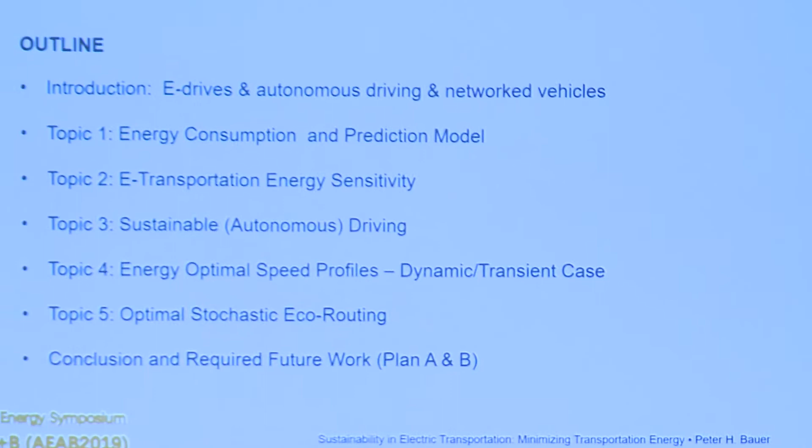Let's go straight to the outline of the presentation. In the introduction, I'd like to give a little bit more motivation, and introduce three arising concepts, namely e-drives, autonomous driving, and networked vehicles, and show you what opportunity those three concepts together provide. Then I'll go through 5 different topics, all related to these 3 concepts.

Topic 1 is basically the model that you need. You need an analytical model to do anything in terms of optimization, but I'd spare you most of the equations. I'll just go through the basics there.

Then I'd go through the electric transportation energy sensitivity — that explains many of the things I'll present later. After that, sustainable driving, that requires autonomy also, and I'll show you the key elements of that.

Topic 4 is the topic I'm currently working on with my graduate students: energy optimal speed profiles. This has the biggest potential for savings, in my personal opinion, so I'll spend a significant amount of time on that.

Finally, if time permits, optimal stochastic eco-routing, and conclusions and required work for the topic of the conference, that is plan A plus B. So let's get started with the introduction.

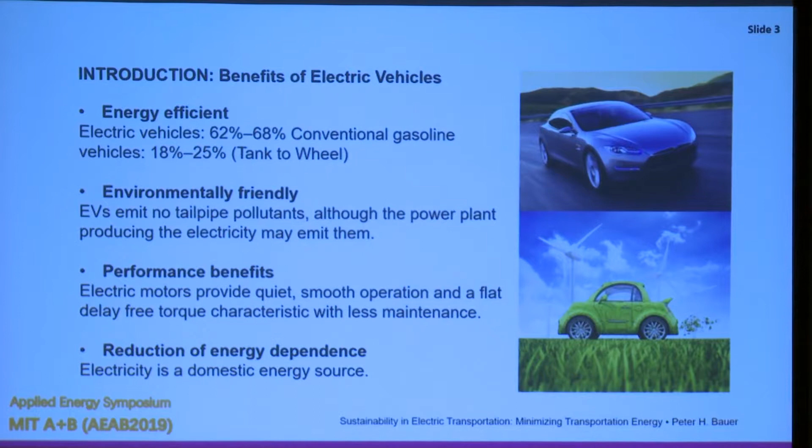Also in the US, a lot of times, the reduction on energy dependency is quite an issue. I'd like to mention two new concepts that are on the horizon that are very important and make up the fundamental premise of this talk. One is the advent of self-driving systems.

In order to execute optimal or energy optimal algorithms, you have to have a computer running your car, because a human A can't do it, and B most likely is not willing to do it. Also, if you have self-driving software, you usually have a pretty high-powered processor in there that can do real-time optimization and execute the algorithm.

Third component is global traffic situational awareness. Right now you hear a lot about networked vehicles and situational awareness concepts popping up everywhere. This is very important to plan ahead and incorporate situations like traffic jams, weather and environmental information. So these three together — self-driving systems, global situational awareness, and e-drives — will bring about many opportunities for sustainability in transportation.

So this is how I see the whole picture. Electric drives together with intelligent transportation systems and autonomous driving, put together, provide a sustainable transportation system. But in order to exploit that, you need to have a good model for estimation and prediction of energy usage in a vehicle. And when you have that, you can do many things with it.

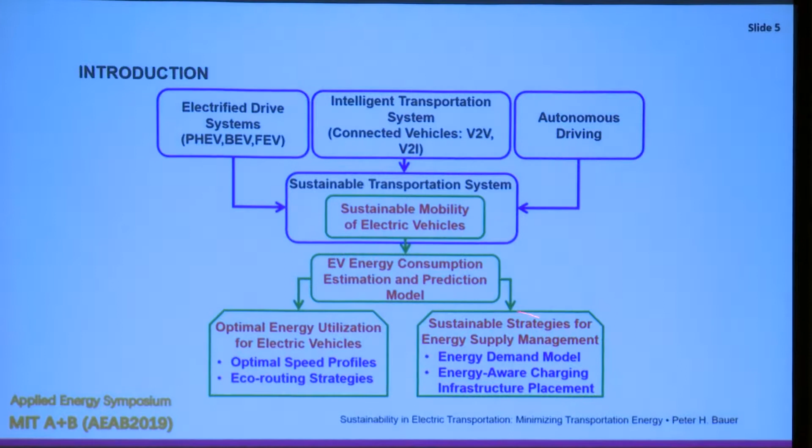Today I'll be concentrating on this side: optimal energy utilization for electric vehicles, optimal speed profiles, eco-routing strategies. But you can also do things like sustainable strategies for energy management, where to place your charging stations, and things like that.

So that gets us to topic one, the model. I don't want to spend too much time on it, but you should know that the battery is basically the primary source of electric vehicles. By the way, this entire talk is on electric drivetrains — what I'm going to show you does not work very well for conventional gasoline vehicles.

The power flow is from the battery to the wheels, going through components like the power converter, motor controller, electric motor, mechanical powertrain, each with an associated efficiency. You also have a reverse power flow for regenerative braking, with different efficiencies associated with it. Very particular in electric drives is that parasitic power comes from the battery directly — so if you have your heater or air conditioning on, that directly affects your range, for example.

If you look at the power needs at the wheel, it has three main components. One is to overcome air drag, the other is to overcome rolling resistance, and the other is to overcome the force to overcome acceleration. There is a fourth one, hill climbing, but we set it to 0 for simplicity in this case.

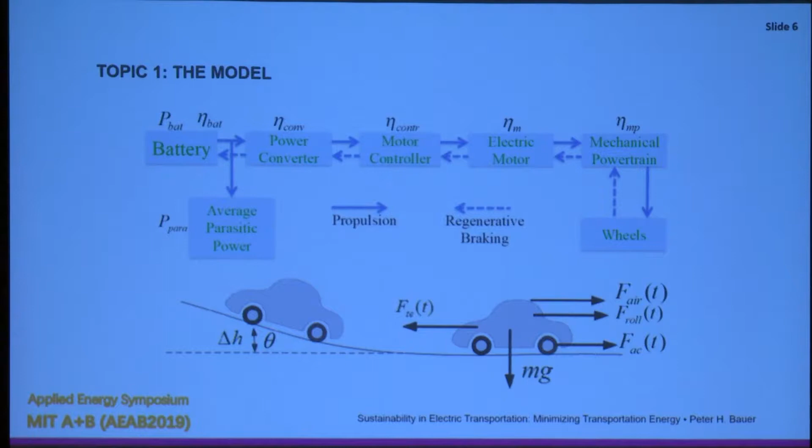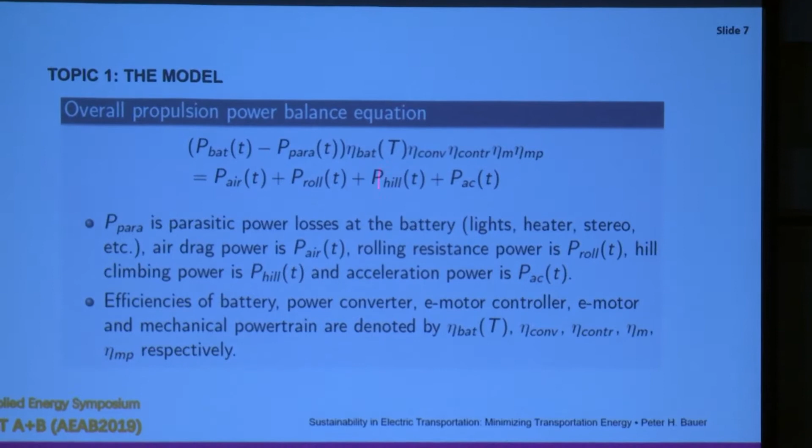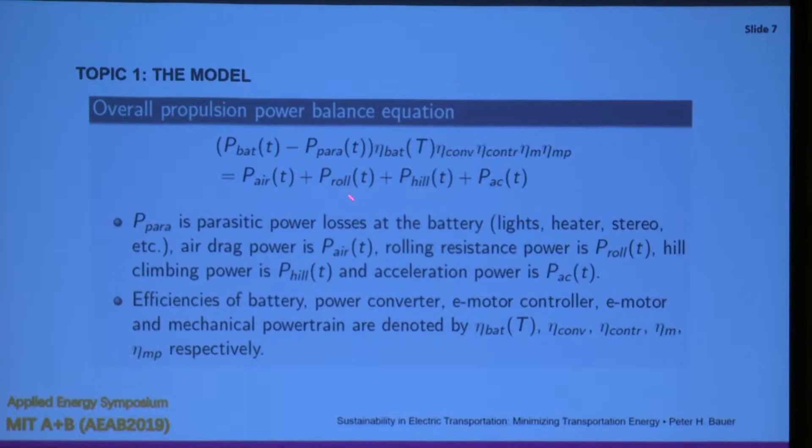So in equations, again, the same thing: the power coming out of the battery minus the parasitic power goes through the cascade of these different components. You multiply all these efficiencies, and what comes out on the right side is the power that arrives at the wheel. That power splits up into air drag, rolling resistance power, hill climbing, and acceleration power.

If you compare this with a regular trip computer, it tells you, well, you have 30 more miles, or you have 50 more miles. For electric vehicles, this is often not good enough, and you need a reachable range or reachable destinations on a map, because due to the high sensitivity of electric drives, these regions are not concentric circles, and they don't even scale with energy.

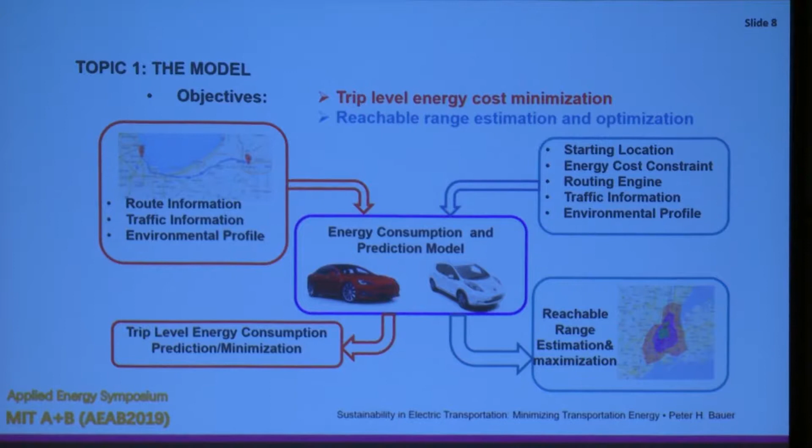So that gets me to topic two, which is very fundamental for this talk: transportation energy sensitivity. Electric drives have a much higher sensitivity to environmental or external effects. For example, wind speed, dynamic coefficient of rolling resistance, parasitic power, and temperature all affect the range and power needs of an electric vehicle. In the first part of the talk, I'm going to suggest that we can exploit these environmental factors.

The question I always get at this point is, yeah, you can do this for electric vehicles, but can't you do it for conventional vehicles? Why is that? The reason lies in the characteristic of the efficiency curves in the torque versus speed diagram. In electric vehicles, you have a large plateau that falls down towards torque equals 0 and omega equals 0. For ICEs, there's a very pronounced optimum in the middle.

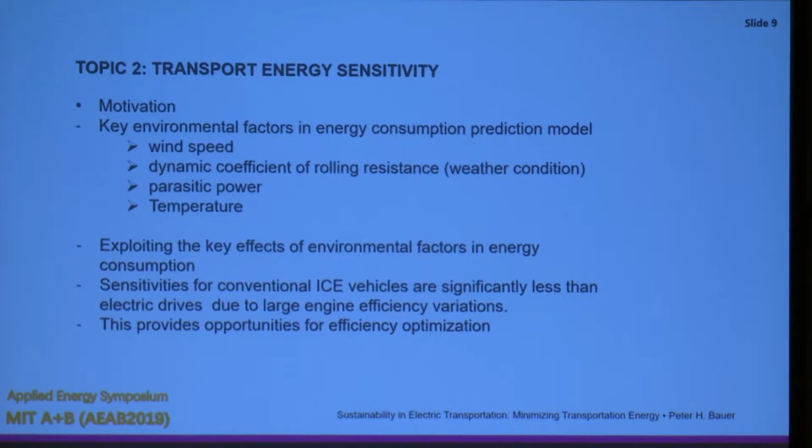So, for example, when you get a headwind and have to overcome that additional resistance with higher torque, a gasoline vehicle moves into a more efficient operating point, masking the effect of the additional power, so you don't see it very much. Whereas in an electric vehicle, efficiency stays about the same, so you need 50% more power, you draw 50% more power from the battery. That's the difference, and at the same time, it provides opportunities for efficiency optimization.

It's well known that depending on where you run your electric vehicle geographically in the United States, it takes more or less power. In warm, flat areas, you're doing much better than in hilly and cold areas.

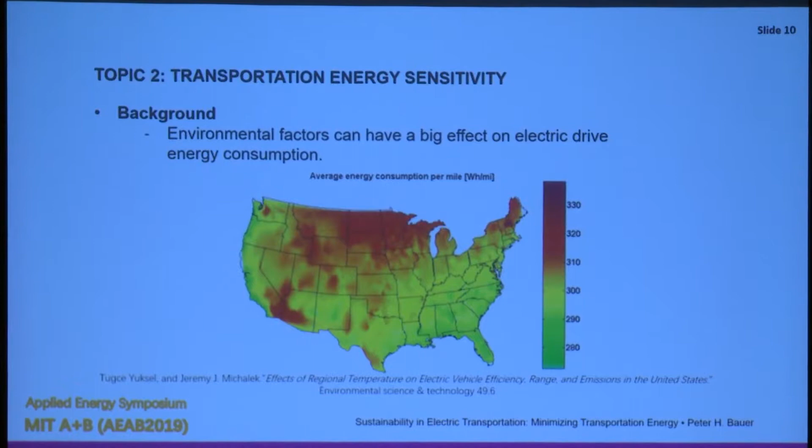So I'll give you a bunch of examples and simulation results showing the different sensitivities. We define sensitivity as the effect of a relative change in quantity x on the relative change of quantity p. X, in our case, is rolling resistance, wind speed, and things like that, and p is the battery power.

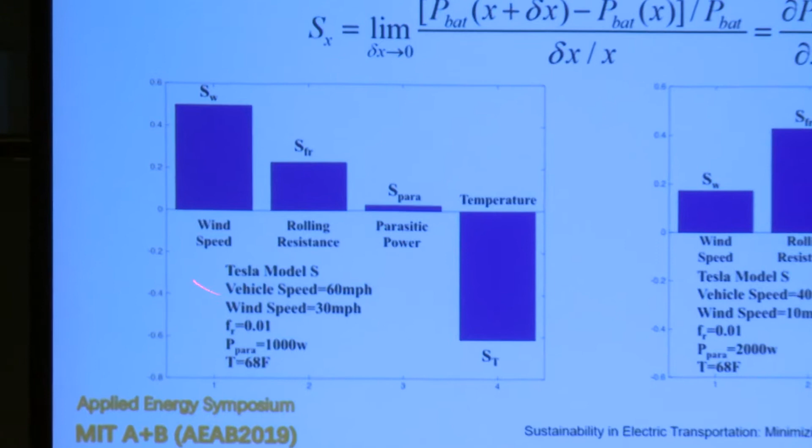Here are two examples to illustrate the point. In both, we're looking at a Tesla Model S. Temperature is the same, 68 Fahrenheit, and rolling resistance is the same, 0.01, which is typical. On the left, we're doing highway driving at 60 miles an hour with a headwind of 30 miles an hour. On the right, we're doing city driving at 40 miles an hour with a headwind of 10 miles an hour. In big cities, you typically don't get lots of wind because it's occluded by buildings.

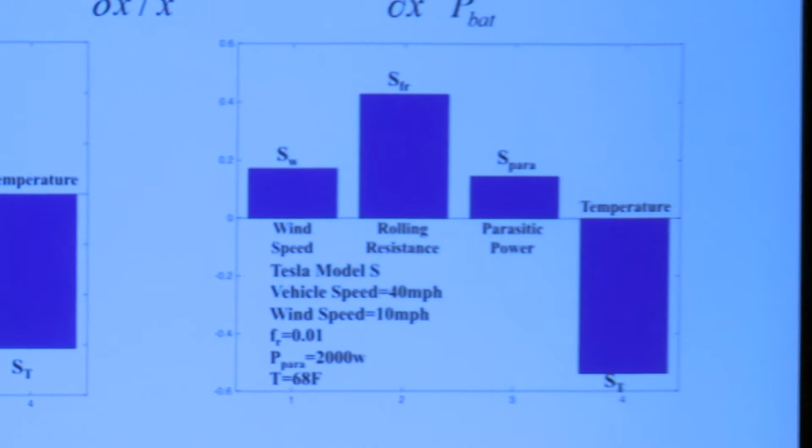So if you look at this, in highway driving, the wind speed sensitivity is huge compared to city driving. Rolling resistance, on the other hand, is not such a big factor on the highway, but in city driving, it makes up quite a bit.

Parasitic power almost plays no role in highway driving because most of the power goes to propulsion, whereas in city driving, this is an important factor. Temperature effects are about the same.

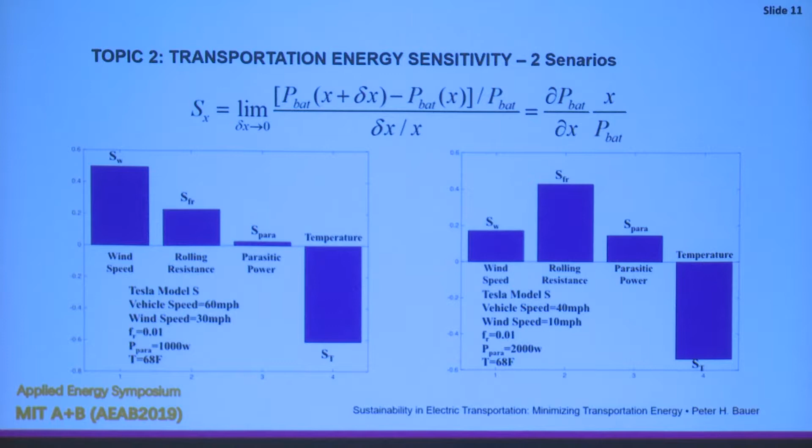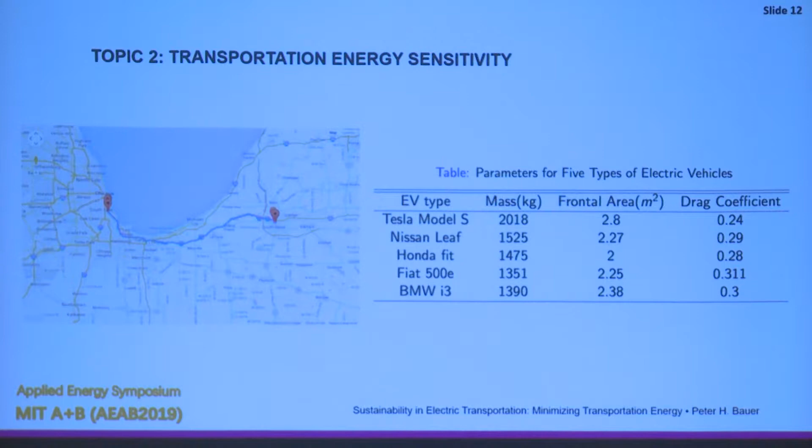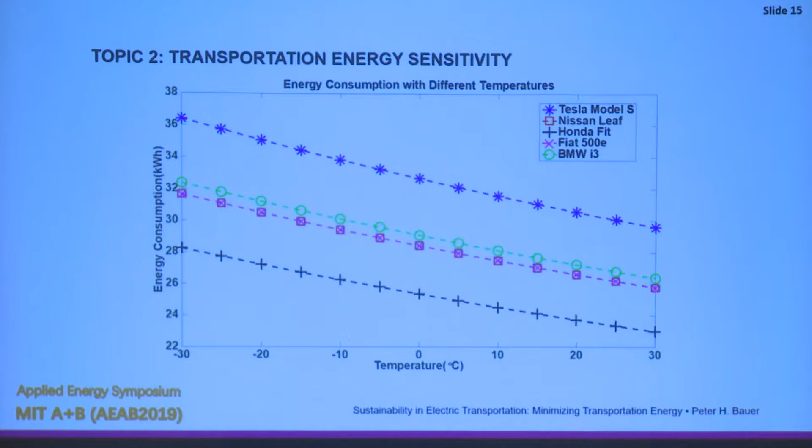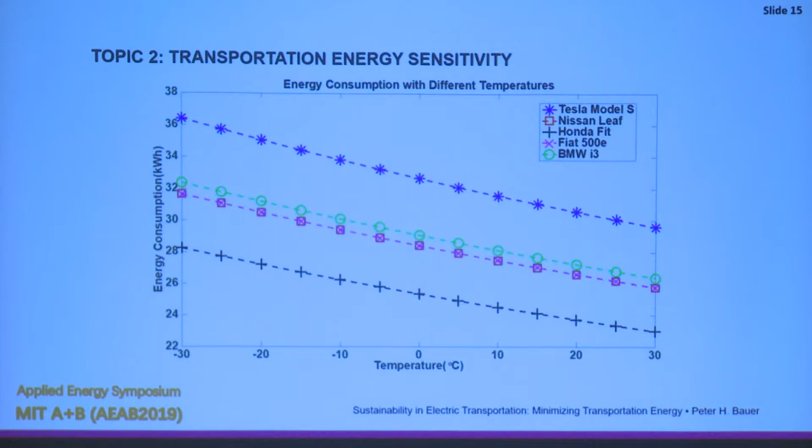The similar situation appears to be the case with temperature. The dependency is not as great, but the warmer the temperature, the higher the efficiency of the battery, and all vehicles perform about the same. For the energy consumption as a function of the parasitic power, there's almost no dependency. Why? Because when you go 70 miles an hour on I-80, you're burning about 30 kilowatts for transportation energy, and whether you have your AC unit on at 100 or 500 watts, it doesn't really matter much in the big picture.

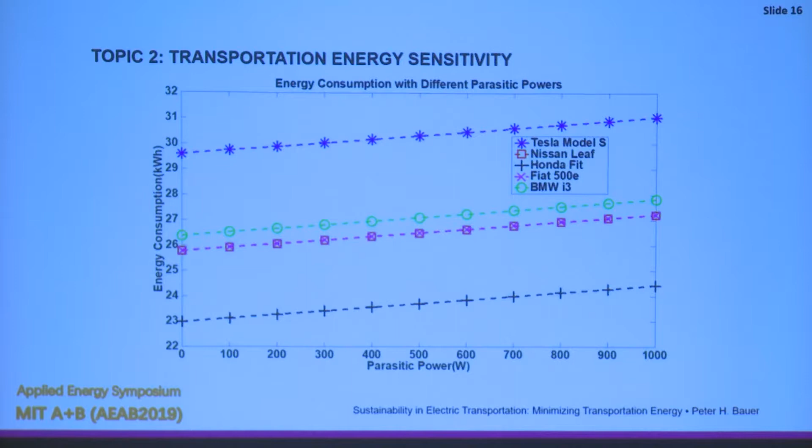All right, that gets me to the next topic, topic 3, sustainable autonomous driving.

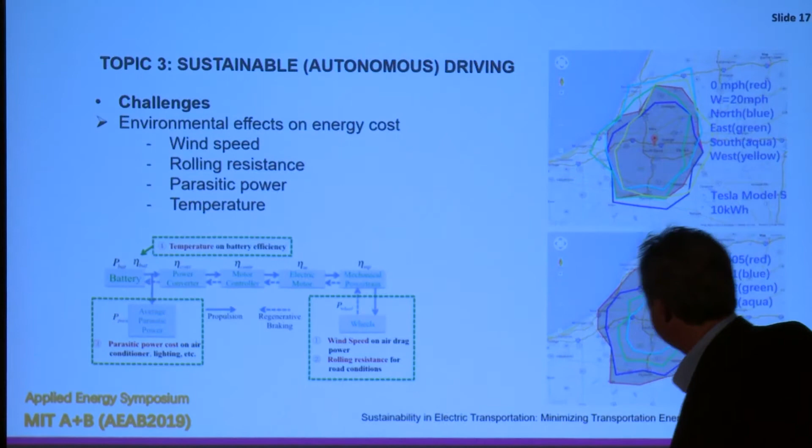So now you can exploit exactly these dependencies to minimize energy. What I'll be doing here is concentrating on the effect of the wind speed. You can, of course, combine all these four effects, but I'm just going through the effect of the wind speed. Otherwise, it would be too much for this talk.

On the right side here, you see the effect of the wind speed in different colors. That's the range of a Tesla Model S with a 10 kilowatt hour energy reserve, and you see how it changes as a function of the wind blowing from different directions. Red is the nominal case where you basically have no wind. The same thing here for the different coefficients of rolling resistance. You again see how the reachable ranges change if you start in South Bend, Indiana, here in the center.

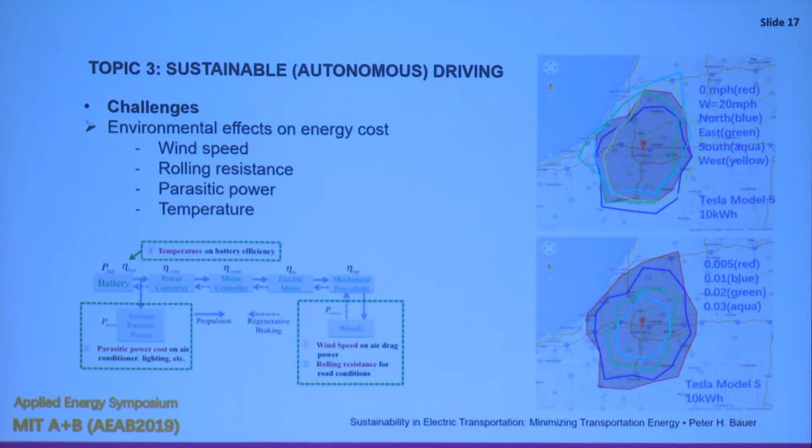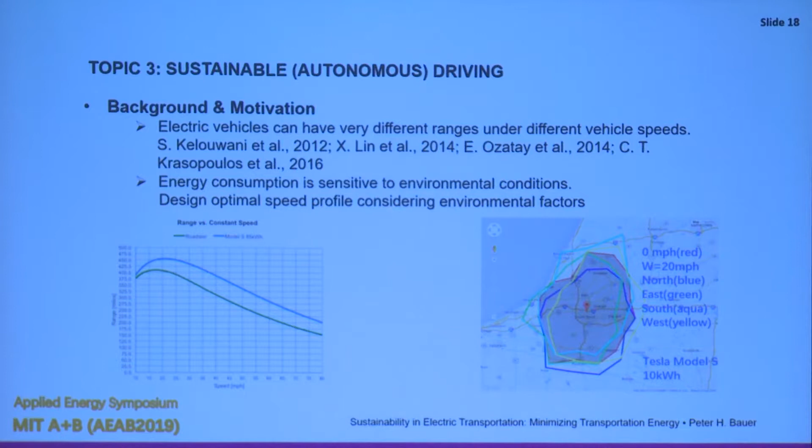It is very well known that the range of an electric vehicle has an exact maximum as a function of speed. This comes from the fact that you have parasitic power. So if you go very, very slow, it's not true that you go the furthest, even though your transportation power is the lowest, because you would take a long time to cover a certain distance, so you burn most of the power in parasitic power, like heating and so on. So there's a very pronounced maximum here. This is important if you want to do optimization.

If you want to do optimization, and I don't want to bore you too much with the equations, you have to get the typical speed profiles, which are given as v of t as a function of time, into v of s, a function of distance, because then you can simply integrate f of s ds, which is work at the wheel, force ds, and then you go 1 over eta, that's the efficiency of the entire driveline, and then you arrive at the energy expended at the battery.

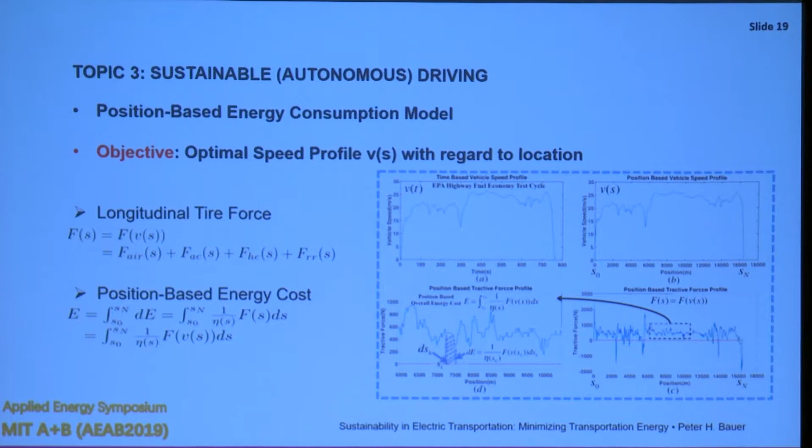So if you do this, you can formulate two optimization problems. One is minimum energy cost with a time constraint, and the other is the dual problem, minimum time cost with an energy constraint. This is the typical one that people want: you want to minimize transportation energy given a certain arrival time. That happens in most cases. There are some situations where you want to minimize time cost with an energy constraint. Think about electric vehicle racing, for example. What would that be? You want to minimize time, given what you have in your batteries, so to speak.

Analytically, the cost function is F ds times 1 over eta, the efficiency. This gives you the energy expenditure at the battery. On the other side, the total time is ds over v of s integrated, because ds over v of s is dt, so you're integrating dt from the beginning to the end. These are the typical constraints in between: minimum, maximum speed, here you have the time constraint, and here you have the energy constraint.

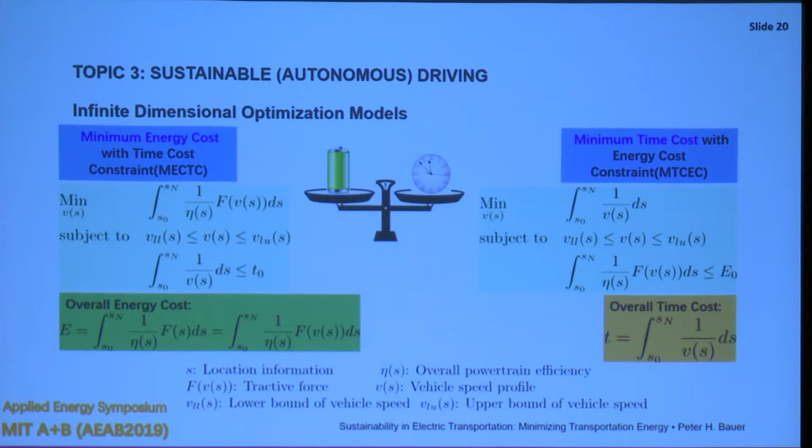Let me show you in the form of an example that this is really relevant and makes a difference. Say you're driving a 10-ton truck with 8 square meters frontal area from A to B, and you have two routes. Route 1 encounters on the vertical part a headwind of 10 meters per second, and then on the horizontal part, variable wind speeds, frontal and from the back. On Route 2, you also have on the horizontal part varying wind speeds between minus and plus 10 meters per second, but then on the second part you have only a tailwind.

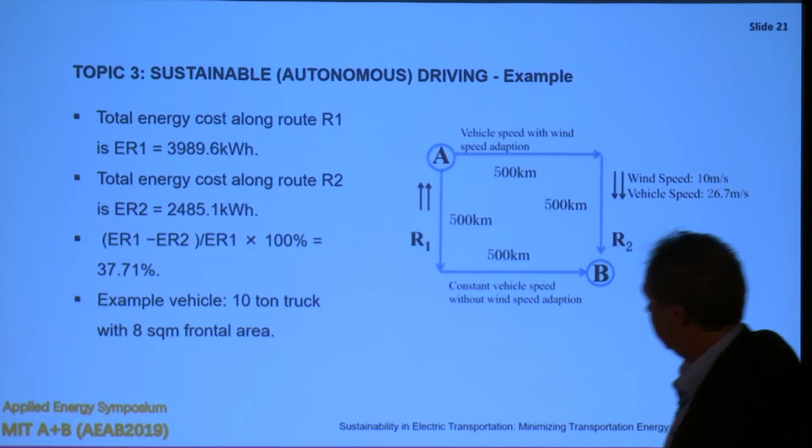If you do the simulation, you'll see that Route 1 costs you 3,989 kilowatt hours, Route 2, 2,485. That's a saving of 37.7%. If you do that with a diesel truck, you don't even see 10%. This is a very pronounced phenomenon that people who actually drive electric cars will tell you it's very sensitive to these effects.

A little word on how to do that optimization with respect to wind speed on the horizontal parts. We assume the wind speed is changing between minus 10 and plus 10 meters per second. So what you do is adapt the vehicle speed to that: if you have a strong headwind, you slow down, if you have a strong tailwind, you accelerate. By adapting this, you can actually eke out quite a percentage gain in efficiency.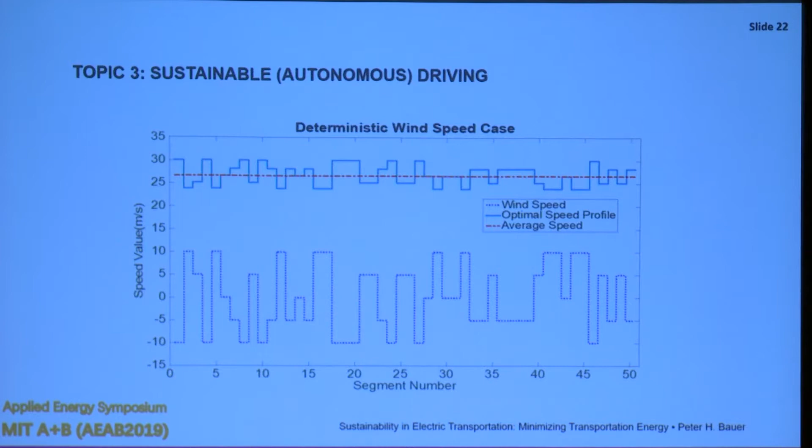That gets me to topic 4. This is something we are actively working on right now, and I think this has the most promise. The example I showed before has savings of 37%. It was a little optimistic because I assumed 20 mile per hour winds, which is pretty strong—you don't have that all the time, so 37% is quite high. It's probably more 15 to 25% under windy situations you'll see in reality.

What I'll talk about here is optimal stop-to-stop speed trajectories in cities. If you think about city traffic, it's always stop-to-stop; even if you have a green wave, eventually you'll come to a stop. With all the debate on emissions in cities, especially the diesel debate going on in Europe right now, it's understandable that especially in cities you want to minimize energy usage, minimize tailpipe emissions, et cetera.

So here I posed 3 questions. Given the average speed between 2 stops, or 2 speed constraints in general, what is the energy optimal speed trajectory? There are infinitely many trajectories that get you from A to B at the same time cost, but there's only one that minimizes energy consumption.

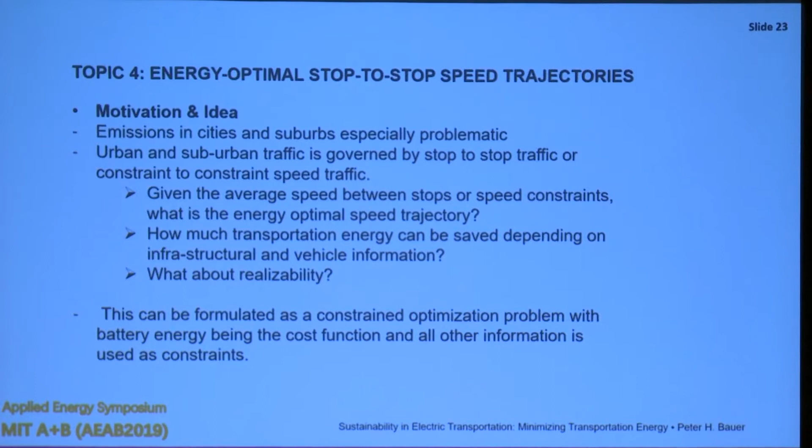How much transportation energy can be saved with the optimal one? And what about realizability? This can be formulated as a constrained optimization problem, as I showed before, where the cost function is only transportation energy. Some of my colleagues have done this before as a mixed optimization—you won't get even close to the gains I'll show here. The cost function has to be only transportation energy, and all other conditions have to go into the constraints.

The blue curve is a typical stop-to-stop curve in city traffic. It actually comes from a distilled FTP75 drive cycle. The red, or orange, one is the optimized one. You see here speed versus time, here power versus time, and this is cumulative energy at the battery over time.

You see what the optimal does: it spends a lot of power at the beginning, energy at the beginning, and ramps up here, but then it coasts, and then it has regenerative braking, recovering some of the energy here. You see there's a difference of about 40 to 50% in terms of energy recovery.

Also see what the optimizer does. The blue trajectory is the regular one—this is in the regen area, that's forward—and this is the optimal one. The optimal one tries to put the trajectory into the high plateau of energy efficiency of electric drives, and therefore you save a lot of energy.

There's a second example. This was a Nissan Leaf for 400 meters, 10 meters per second average speed, so that's 40 seconds total trip time. If you go to this example, that's 100 seconds trip time, also at 10 meters per second average speed. You see what the optimizer does.

It does not want to go at a constant speed here, because at constant speed at 10 meters per second, you would be in the bad efficiency areas shown in blue or yellow. So what it does is it accelerates hard, it coasts, accelerates, coasts, always putting the operating point in the high efficiency regime.

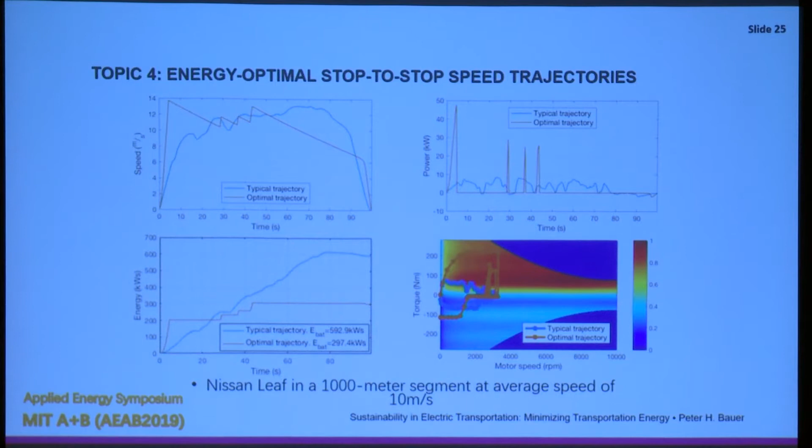With that, you again get 50% energy savings, which is actually huge. And imagine a 50% energy savings in city driving translates into a doubling of the range of the vehicle, roughly, because there's parasitic power, so it's not exactly true.

So here we put a table together for two vehicles, the Tesla Model S and the Nissan Leaf, two different speeds, 10 and 18 meters per second, two different segment lengths. Now you see how the infrastructure, segment lengths and speed, affect the energy savings. You see they are consistently in the 40 to 50% range. Only the Nissan Leaf at 300 meters is down at 26.

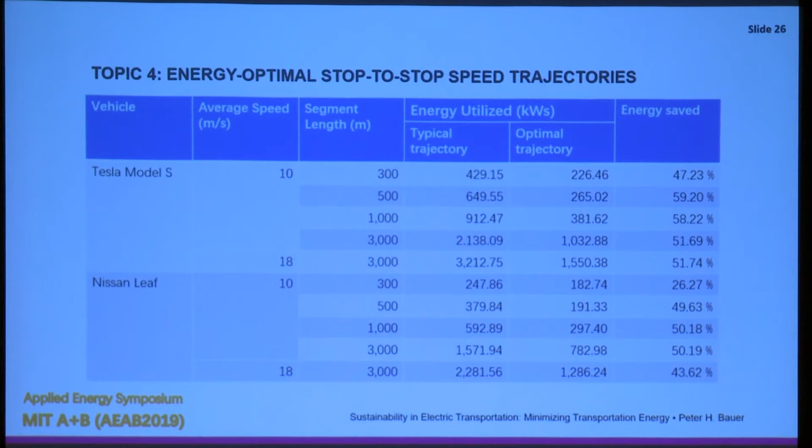One particular thing we observed, which is absolutely not true for conventional vehicles, is the more acceleration power you have, the more you can save. This is counterintuitive compared to gasoline or diesel vehicles.

In general, as a summary of the results for topic 4, it turns out that vehicle parameters like mass, air drag, rolling resistance are not that important. It doesn't really change too much the optimal trajectory. What's important is the distance segment length, the efficiency map of the drivetrain, and basically the environmental conditions. Also, powerful vehicles have an advantage.

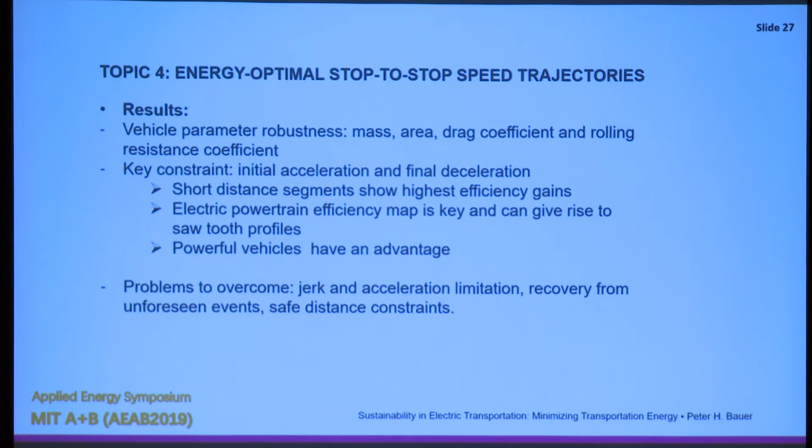Of course, the problems to overcome are jerk. In an autonomously driving vehicle, if this thing takes off with 8 meters per second squared without a warning, you're going to wear your cappuccino in the car because you couldn't expect it, right? So you have to have a method to kind of ramp this up somehow, or give a warning or something like that. And if you reduce the acceleration, then you get some penalty on the savings.

Two afterthoughts to this. These are the optimal trajectories for 5 different vehicles, same infrastructural constraints, same arrival time, same distance. Except for this one outlier, which is an artificial vehicle, not a real vehicle, that's what we call a lossy vehicle—huge CDA product and very little mass, so very little recoverable energy through regenerative braking. Except for this one, all the others look very, very similar—all the optimal trajectories come in very close.

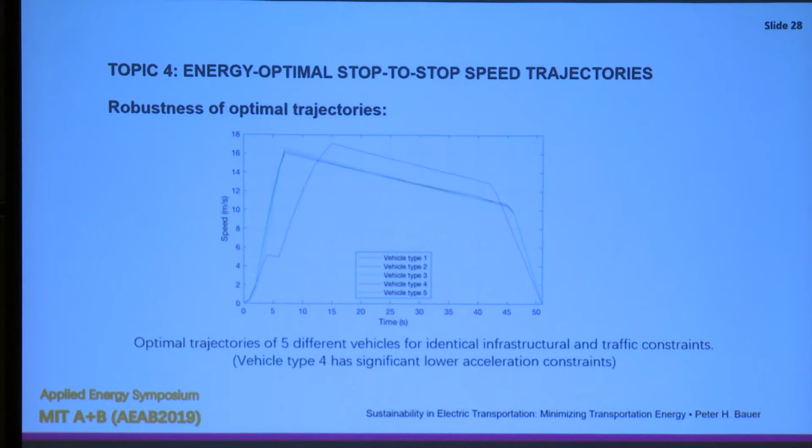What does that mean? What are the implications of that for urban driving? This is what it means: it means platooning in urban situations makes sense. Because then you have a lead vehicle that has all that software, self-driving etc., and all the following vehicles only need to have level 2 or level 3 self-driving. And you can save a lot of energy. So this is the kind of stuff we are working on right now. I don't want to get further into that.

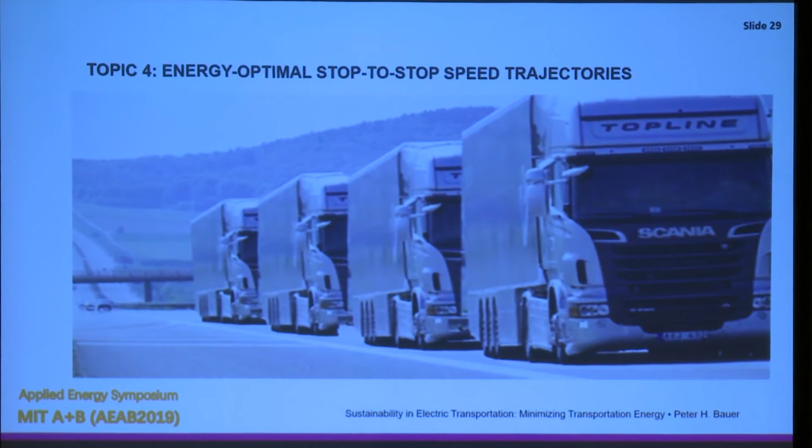This leads me to topic 5.

In topic 5, we looked at stochastic optimal eco-routing. The problem is this: you want to go from a starting location S to a destination D, but you have many different routes you can take. Each vertex is labeled with an energy cost. This energy cost is stochastic. It turns out if it's distributed as a Gaussian, there are some really nice ways to solve this problem analytically. Unfortunately, in reality, it's not Gaussian.

What you do here is minimize the expected value of the sum of the energy along a particular route, with a constraint that you reach your goal—basically an energy constraint. You have eta in your battery, so to speak, and the route costs you the sum of Eij, Xij, and you want to satisfy this with probability P. This is just a connectivity constraint on the graph.

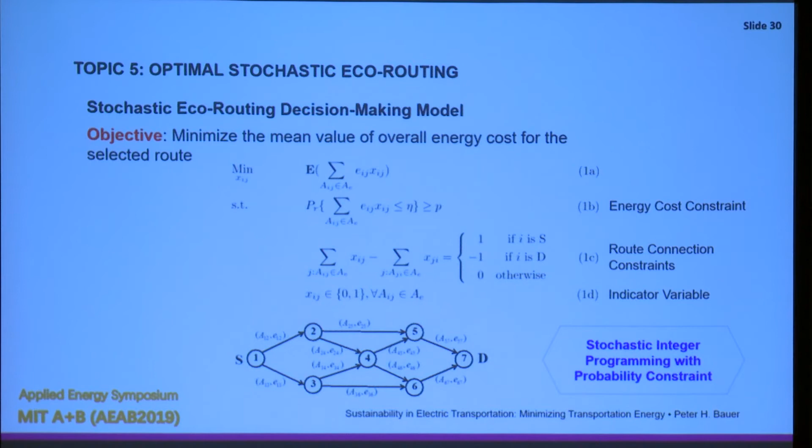And if you do this, you can actually do optimization of long trips or city driving. If you do this in city driving, this is a city of 10 times 10 blocks.

The surprising outcome is that different wind profiles, different vehicles, and different regen efficiencies lead to different trajectories through the city. In terms of distance cost, they're all the same because you're going diagonally from down there to up here, unless you reverse direction. But if you always go forward to the goal, the distance cost is always the same. With these different environmental conditions, the optimum path always changes.

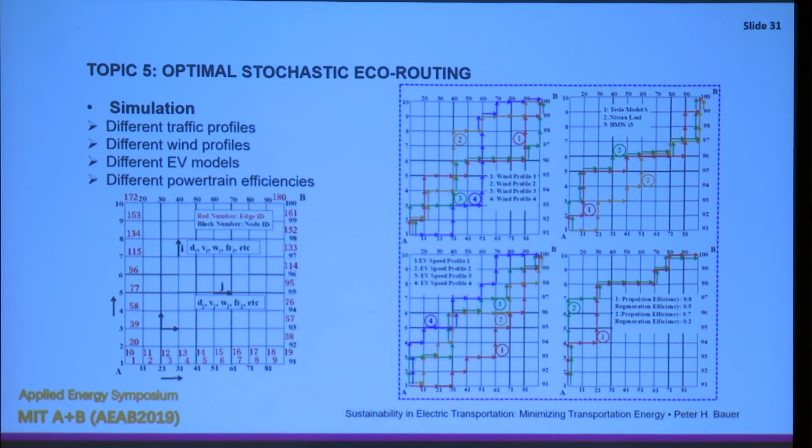I'd like to come to the conclusion and reinforce that there are three concepts that are key to what I think will be a revolution in sustainable transportation. They come from the energy-aware optimal e-driving strategies. You need an electric drive, but you also need situational awareness to make the whole thing happen. This is the networked vehicle concept, where you can communicate data on what's coming.

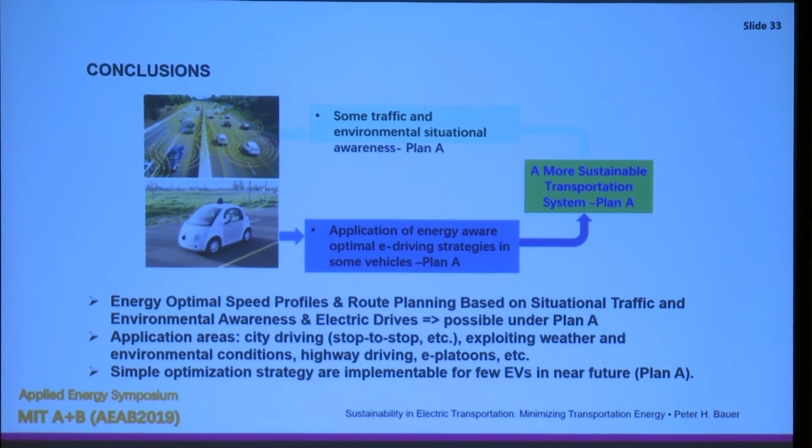But communicating wind speed half a mile down is very difficult, or communicating other weather situations. Waze already does things like showing a traffic accident or congestion, but communicating environmental conditions is difficult. So some of this you can do now under plan A, because we have some traffic situational awareness, electric drives, and some level of autonomous driving. So now is the time to get this started.

Of course, the end game would be global situational awareness and application of energy-aware optimal e-driving strategies in every vehicle, or almost every vehicle, and then you get global sustainable transportation.

So what are the showstoppers so far? A few things that are missing are the handling of unforeseen situations. You cannot always predict what happens half a mile down the road. Even though you have sensors and situational awareness, there may be a dog crossing that nobody knows about, and then you have your trajectory, and it goes down the drain, and you have to brake and recompute everything.

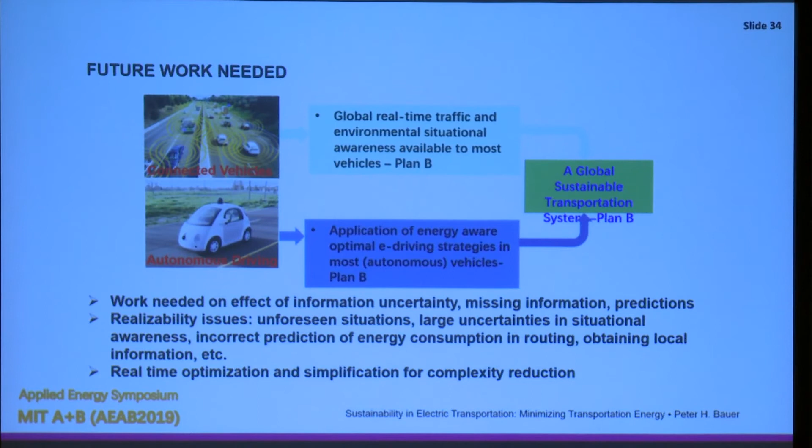The other thing is real-time optimization—it takes a lot of computational power to do this from stop to stop. But there are ways around that. Finally, what you can do in the meanwhile is have interim solutions: dedicated lanes and urban platoons, maybe in fleets, in city vehicles like city buses, and this way get the entire process started.

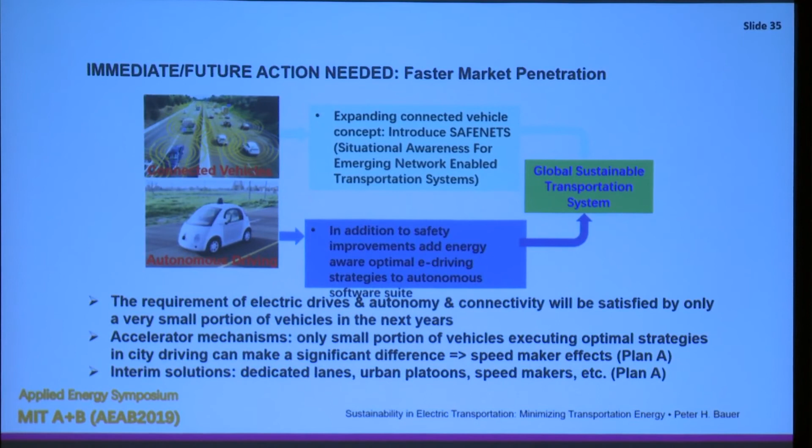Well, this concludes my talk. I'd like to thank especially Eduardo Mello and Songen Yi, who both did their PhD with me, and I drew material with their permission from their theses. I'd like to open it up for questions.